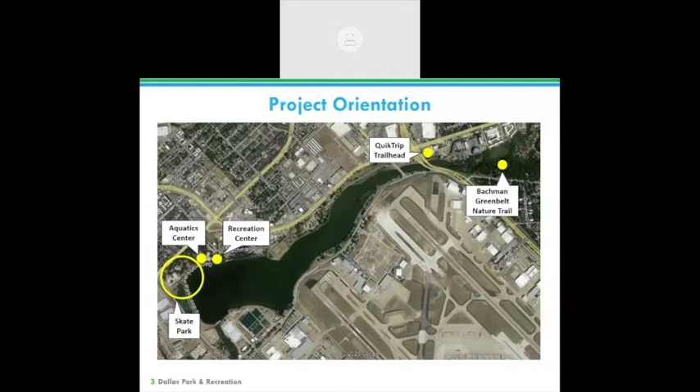Just for orientation, this is the location of the various projects, so you can see where they're distributed around the lake. So again, first up will be the Recreation Center, on that northwest corner of the lake.

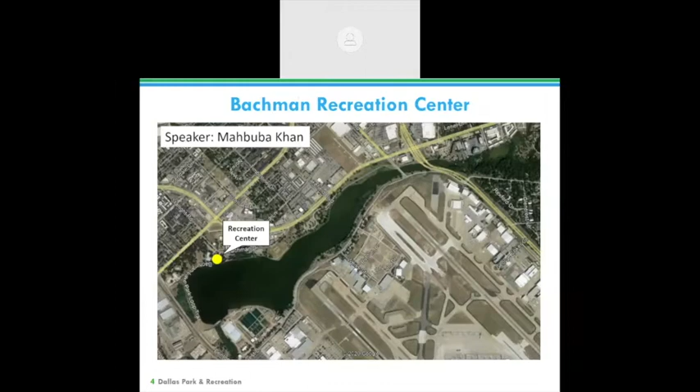Good afternoon, everyone. I am Mahbuba Khan, a licensed architect serving as a Park and Rec Department project manager on the Recreation Center renovation scope of the project. This project is a 2017 bond-funded project. The overall fund is $3.9 million, which includes soft cost, management cost, and construction. The scope involves exterior renovations, restroom renovations and upgrades for ADA compliance, flooring replacement in the main entrance area.

And control area renovation, which is the reception desk—when you enter the rec center there is a long reception desk, and we are going to renovate that. There are two more areas not listed here: break room renovation, and also some upgrades to the multi-purpose room. We have already done some work, like pool restroom plumbing repair, and the gym HVAC upgrades, from this money.

Currently, we are finishing up the mold abatement of the project. There was a lot of mold, and that's being abated before the rebuild is done. So we started the construction last month. The demolition was done before, and then we got the permit and restarted the construction on June 29. The expected construction completion date is November 2020.

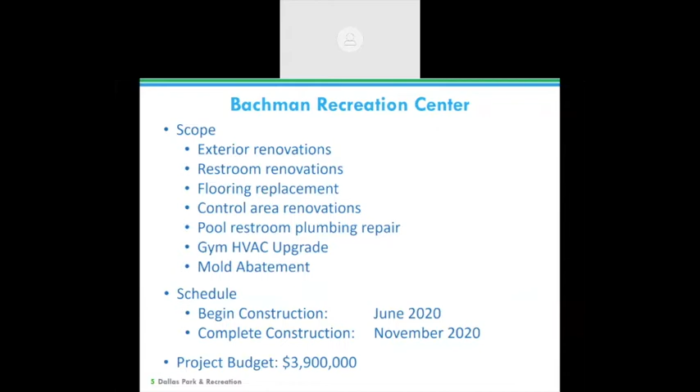Next slide please. So to give you some background of this rec center—Bachman Rec Center serves a large population, including special needs adults and children both. People from different parts of Dallas come here for this service. This rec center has an adjacent playground which is also accessible.

This slide describes the plan of the entire rec center, minus the swimming pool. The area of renovation mainly is on the left-hand side where you see the blue and yellow lines. We are renovating both sets of restrooms in this area, making them ADA compliant and wider, and also doing some work in the break room, like upgrading the cabinetry, and some painting and refreshing in the multi-purpose room.

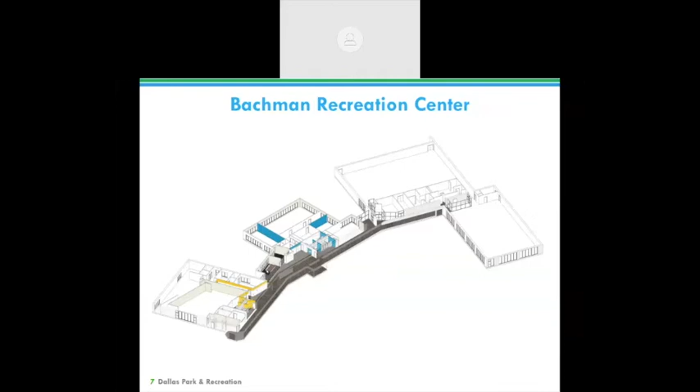As I mentioned earlier, we're going to have a new reception desk. This desk will be refurbished to give it a new look, and we'll also address the COVID-19 concerns by having plexiglass in front of it and things like that.

As you can see on the right-hand side, there are a set of restrooms. In the design concept, we incorporated color coding, so each set of restrooms is coded with a color like blue or yellow, so special needs people can know where they are in the building and which set of restrooms they're going to. The man and women signs are very prominently done, so nobody gets confused.

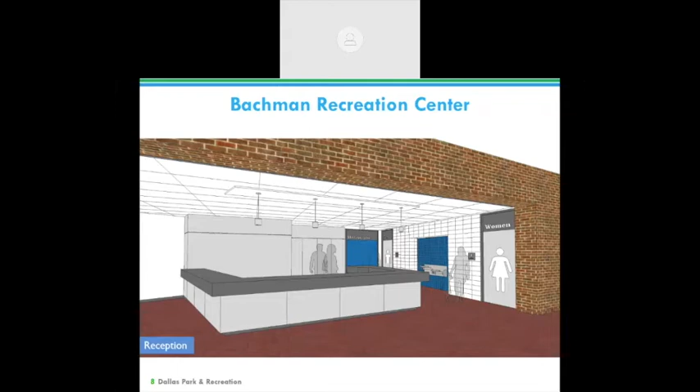Next slide, please. This is another view of the same set of restrooms. Next slide.

This is the other set of restrooms, next to the multi-purpose room. We will also install a new water fountain with a water cooler, which is not displayed in the rendering, and a water bottle filler.

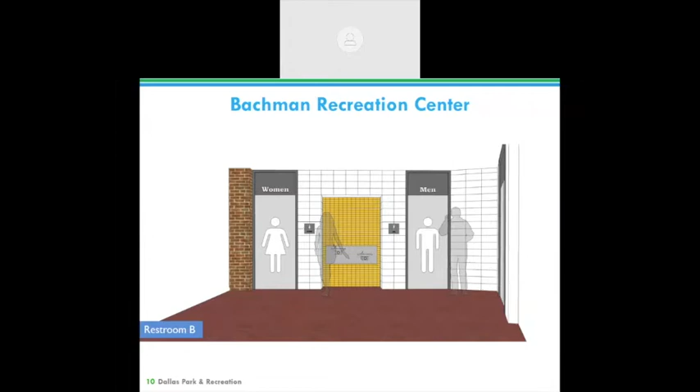Next slide, please. So that was all of the renderings for the renovation of the recreation center. As I mentioned, our completion date is expected November of this year, and the new aquatic center will be attached to the existing rec center, towards the pool side. Thank you so much.

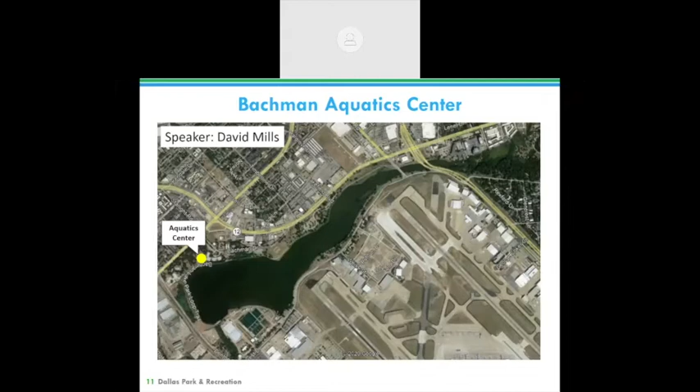This first slide shows the location of the new aquatic center. It will be immediately west of the recreation center. Next slide, please.

Just a little bit of background on this project and Dallas Aquatics in general. In 2013, the City of Dallas Park and Recreation Board adopted the Aquatic Facilities Master Plan, which included recommendations for the construction of swimming pools and spray grounds throughout the city.

The 2017 bond program, which was approved by the voters of Dallas in November 2017, allocated funds for aquatic projects, including the Bachman Aquatic Center.

The Aquatic Master Plan identified 3 different sizes of aquatic facilities: regional, community, and neighborhood. Bachman is considered a regional aquatic facility, which is the largest of the 3 sizes. After the Bachman Aquatic Center is complete, Dallas will have a total of 4 regional aquatic centers. The other 3 are Crawford, Fretz, and Samuell Grand.

The Bachman Recreation Center is unique in that it's the only recreation center in the city that has an indoor pool. The location of the existing pool on the west side of the building, and a largely open area on the site, were the key factors in determining where the new outdoor aquatic facility needed to be located. Next slide, please.

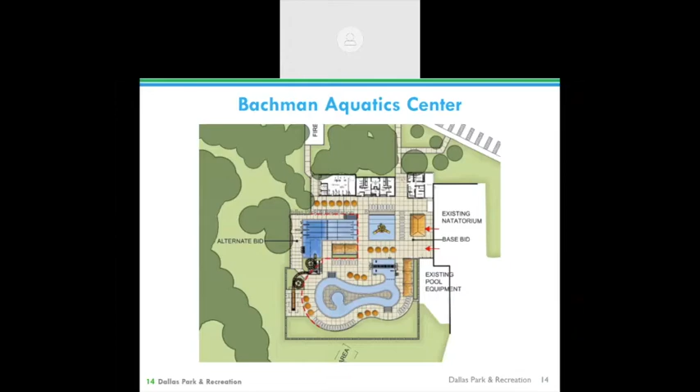There'll be landscaped areas within the fence. Grassy areas will provide opportunities for lounging on towels and places for kids to go and play. Next slide, please.

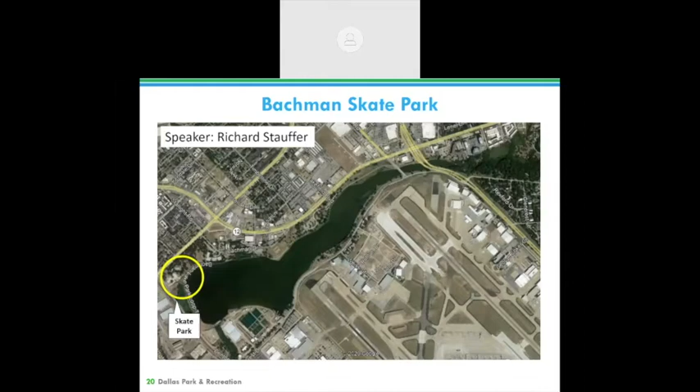Yes, the Bachman Lake Skate Park location hasn't been established yet. That's just sort of a tentative location just to show where the amenity may go. But we're entering into a professional service contract for the design, and we should have the contract approved probably this fall. Part of the contract is for the consultant to coordinate with the Bachman Lake dam design team that's hired by Dallas Water Utilities. They're going to evaluate the various locations out at the lake and take a look at the type of constraints with respect to the dam, floodplain regulations, and identify a suitable location for the park.

We're also going to have to include consideration and collaboration with other city entities to accommodate flooding that exists at Bachman Lake. And what we're looking at here is to establish a regional and a national type of draw, owing to its proximity to Dallas Love Field Airport and the other prime amenities of the city. We also have, as you know very well, DART access there. So it's one of the good things that we have going for us there with the park.

We're looking at doing somewhere 30,000 plus, maybe 75,000 square feet, depends if we can get it, permanent poured in place concrete park. We're looking for features that are going to be suitable not just to the higher end type of pro skaters, but to all levels of skating. We want people to feel very confident and very good with being able to go out there and take their children, and for kids to know that they can go out there and skate and have what we call good flow patterns, to where they're not going to be colliding with other heavy type of users.

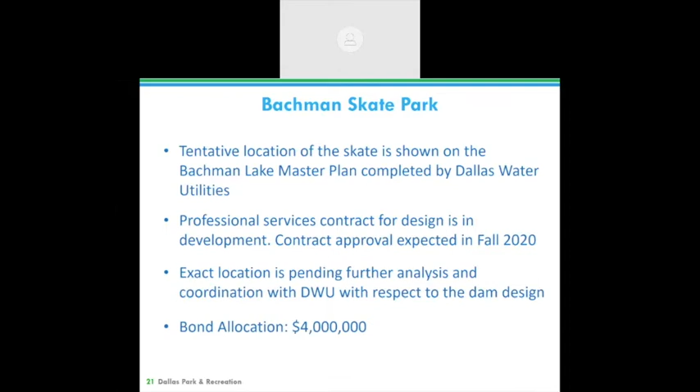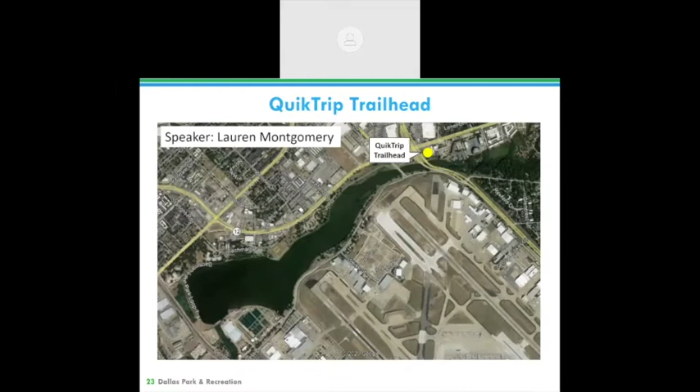Hi, everyone. Good evening. My name is Lauren Montgomery, and I'm a consultant for QuikTrip and have been working on this project, this store in particular, now for a little over a year. Everybody, I think, is pretty familiar with the location. Jared, thank you for noting it out there on the slide. If you want to go ahead and go to the next slide, that would be fantastic.

We are in the process of working through permitting for both the trailhead related improvements and the QuikTrip store related improvements. We are expecting to have all of that process complete by the end of this year, early next year, with construction scheduled to start on both the store and the trailhead improvements in 2021.

I know there were some questions received prior to the meeting about the sidewalk underneath the bridge and what that eventual width would be. We are planning to remove and replace the existing sidewalk, and it will end up being 8 feet wide, cantilevering out over the water surface of Bachman Lake. There will be a handrail there as well.

We're working through the lighting under that, and we know it has to be lit. We're just working through the elements of the lighting and figuring out how to get the lighting down there.

There were some other questions about whether the Dallas Streets Department would be involved in any of these reviews. From a street perspective, no. Transportation will have to approve access points, but we've had those conversations several months ago and have really fleshed out, I think, all of those issues to date.

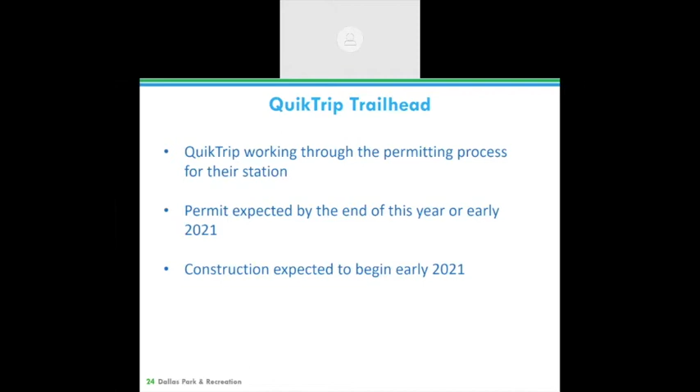Thank you. So our final item tonight is a look at things to come regarding the Greenbelt Nature Trail that's proposed. We're talking about the area that's near the QuikTrip area, the large greenbelt that's to the east of Lemmon Avenue.

What we're looking at is developing approximately 2 miles of natural trails within the greenbelt itself. Since this is a look at things to come, we're working on scheduling the next community input meeting. We don't have too much information to share, but we're hoping to get this meeting scheduled within the next 2 to 3 weeks where we can delve more in depth into what is being proposed and answer a lot of questions at that meeting.

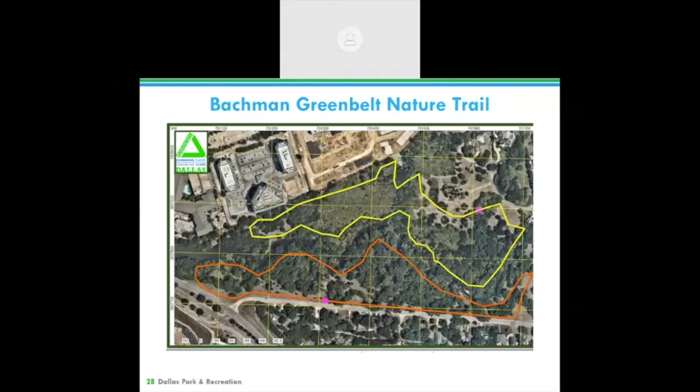So there will definitely be some more information to come on that within the next 2 to 3 weeks. Keep on the lookout for that. And I've provided my contact information.

We had a lot of speakers this evening, but if you have questions outside of this event, please contact me directly. Then I can send each individual question to that specific project manager and keep those organized for everybody. That concludes our presentation. So I'd like to hand it back over to Susanna and the Friends of Bachman Lake, and we can begin answering some questions for you.

Susanna might be attending to some issues here. So this is Michael with Friends of Bachman Lake. We did have some questions that were sent earlier. We weren't sure if they were going to be sent through the Facebook chat on our behalf or on behalf of the people who did submit them. But one of them has to do with the master plan.

It basically reads as: given all the changes coming to Bachman Lake and the park, and the fact that Park and Recreation has done and is currently doing master plans for many other parks in Dallas, shouldn't we have one for Bachman Lake Park?